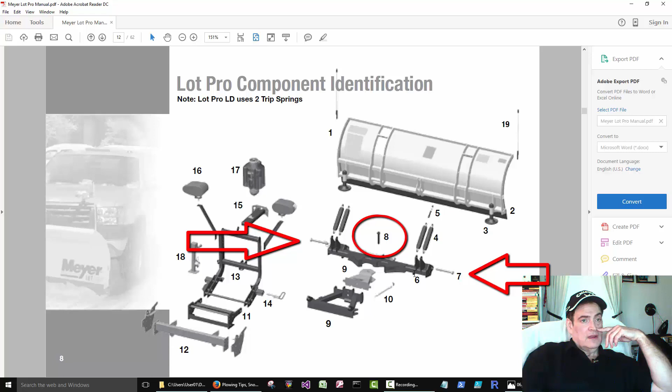That might be an important thing to check every time you go out. King bolt - that too. King bolt: heavy duty high grade bolt that attaches the frame to the pivot bar. Yeah, that too might be a good thing to glance at. So these pins here hold the plow onto the bar, onto the pivot bar. So: king bolt, pivot pin, and pivot bar.

A-frame, I think most people know what that is - that's this guy here. 9, A-frame: designed to attach the snowplow to the vehicle, to pivot the mold board for angle plowing, and to hold the plow at proper distance in front of the vehicle. 10, power angling cylinders - that's these guys, they kind of look like big shock absorbers, but they're hydraulic cylinders. 11, clevis frame. So these are parts underneath the plow, or underneath the truck.

I have that other video where I put the camera up under the truck and we try to check out some of the parts there. It's kind of hard to see what's going on under there.

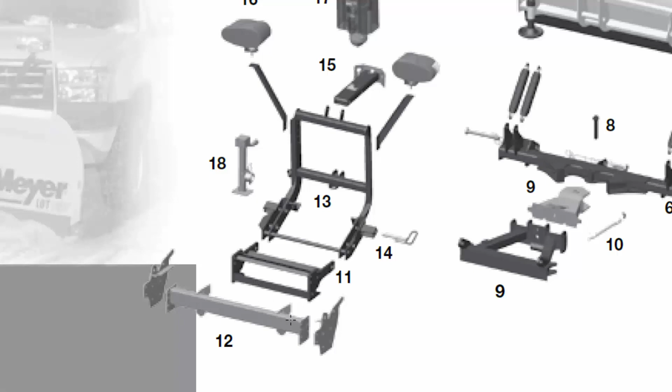Lift frame, 13. Oh wait, we missed one. 12, mounting frame. Custom mount designed to fit the plow system to your vehicle.

Lift frame allows for fast, complete removal of front end hardware. Snowplow, lights, hydraulic unit, all in one complete module. Lift frame. That would be 13.

14, dual lever dismount system. Pull the handle, release plow system for easy on-off. 14, dual lever dismount system. Pull handle to release plow system for easy on-off.

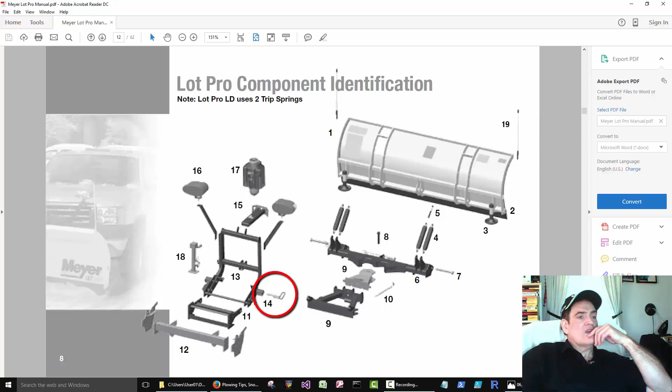These handles here. I have one that's broke, and the mechanic told me to order it. He'd put it on. There's one on each side, one on this side and one on this side.

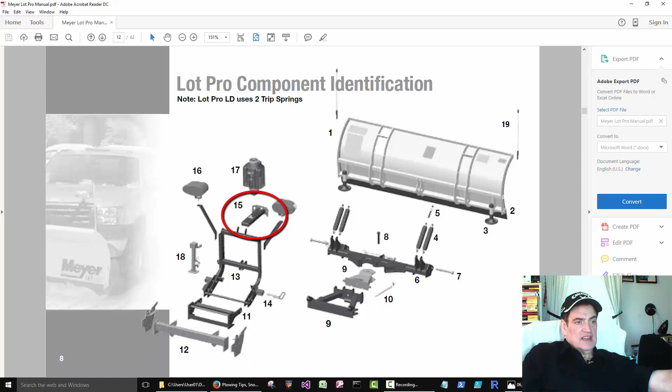A lift arm, 15. That must be this big metal thing that the chains attached to. Doesn't look like they're showing the chains. There's two chains that drop down. They're about 2 feet long, 3 foot long.

So lift arm holds dual chain to lift snowplow. Warning, lift arm extends beyond bumper of vehicle to minimize damage from a front end collision. Lift arm should be removed from vehicle when snowplow is removed.

16, Meyer Night Saber 2 snowplow lights complies with federal regulations. So this is the lights. The lights come up. Here's the left headlight. Here's the right headlight here.

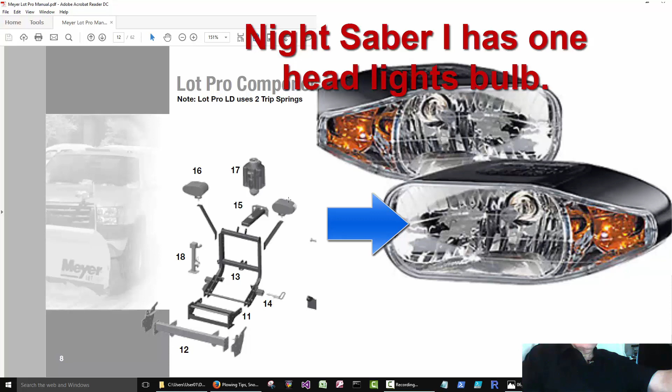17 and 18. 17, hydraulic power unit operates snowplow hydraulically, raises, lowers, angles, holds. Okay, so that's the important part.

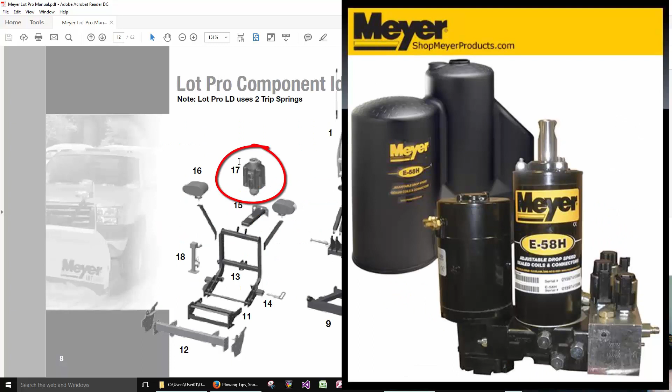I looked on the Meyer website, a new one goes for about $1,800. So that's the main thing I think they steal, the hydraulic unit, and that's where the lock goes.

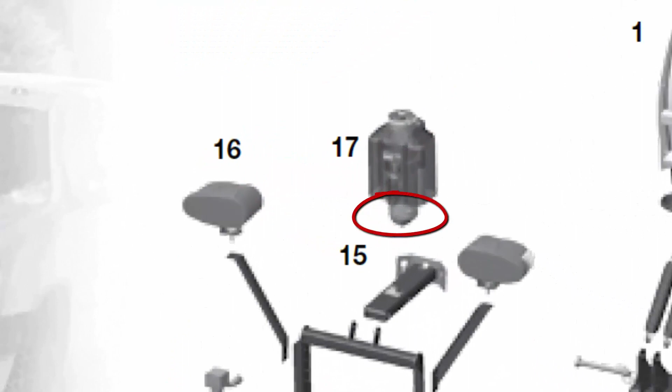I think the one lock goes on this part right here, and it locks this to the frame. There's 2 locks that I saw on the web so far, Meyer website.

First one I saw was $25, and I know I read it fits all Meyer's plows. Then after I ordered that one, I saw another one that was - the one I ordered was 3 inches, and then I saw another one for 2 inches, and the one for 2 inches is like 80 bucks or 60 bucks, so it costs a lot more. So you have to wait to see if the one I ordered fits.

So if you're going to order parts, I just call them. Before I bought it, before I went and picked it up, I called the Meyer office, and I actually got to talk to a tech. He might have been a salesman, I'm not sure, but he knew what I was talking about. I was worried about driving it home on the freeway. I had like a 60, 70 mile trip or more on dry roads.

This guy here, there's a plastic cover over that. I think there's actually like 2 or 3 things inside there.

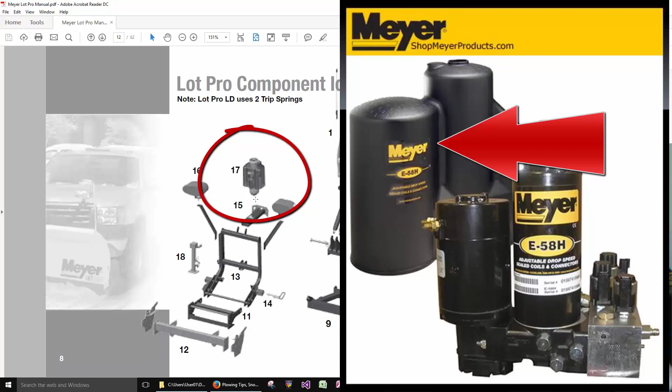And then 18 here, what's 18? Crank stand. Positions mold board and lift frame for easy attaching and detaching. Adjust plow height and varying ground condition for easy dismount.

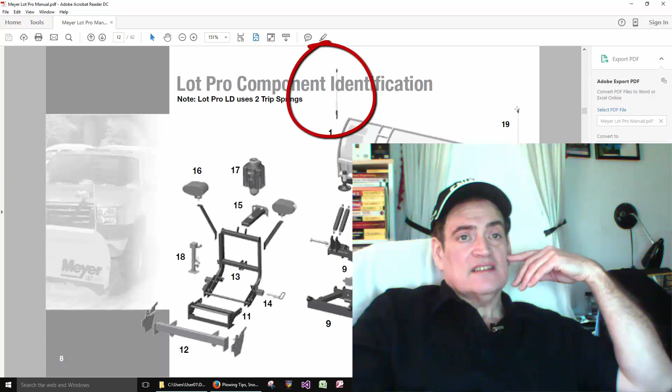Plow markers, 19, that's these things that stick up. Those don't come with the plow. If you want those, you got to order them, buy them. So if you're looking at a used plow, all these other things are an extra cost. So if it comes with these, that's a better deal.

And you can see they aren't talking about that front piece of plastic that keeps the snow from going over the board. So I think that piece of plastic is 300 bucks alone.

So this thing here, I don't know what that is. I haven't seen that. I don't have one of those.

Crank stand. Positions mold board and lift frame for easy attaching and detaching. Okay. So it just goes through all the different types of plows here.

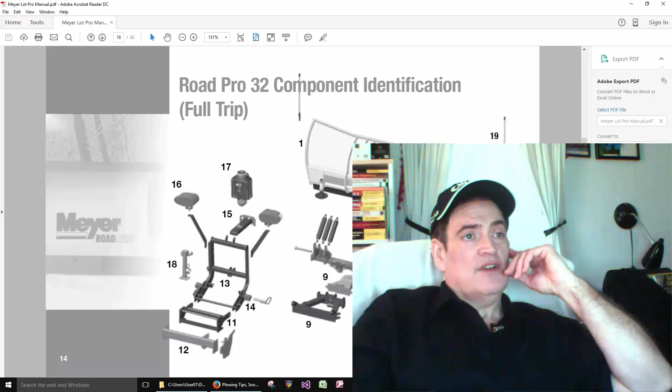Here's where I got the information for the controller I did that video on, so that was pretty good. And they go through the different types of controllers here.

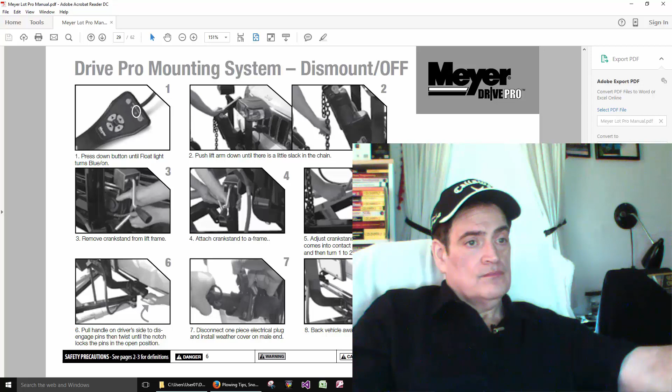Here's the part underneath the plastic. Yeah, I said there's like 2 or 3 different things up under there. It's covered with that plastic so it doesn't get dirty and salty.

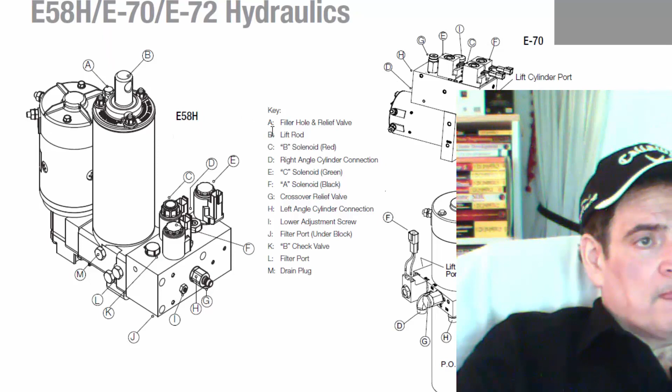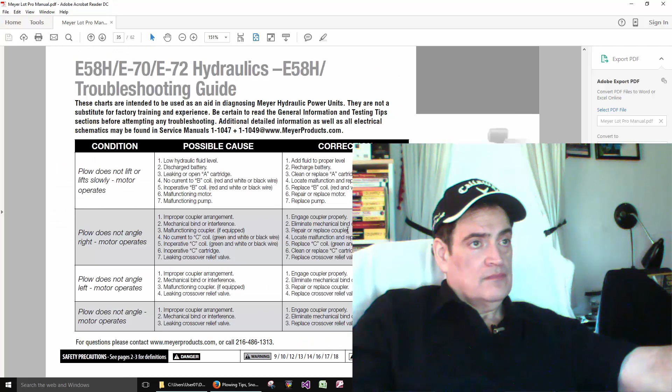Hydraulic testing tips. Troubleshooting guide. Okay, we'll go over more of this later.